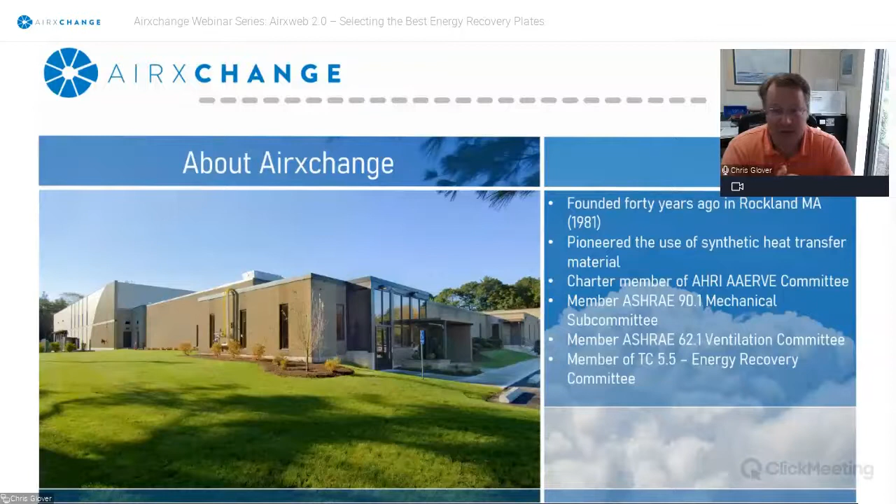We are a dedicated OEM component supplier, so we do not compete for air handling business. We just work on heat exchanger components, and hopefully we do that very well. We currently have over 300,000 components in the market, and that number continually grows year after year.

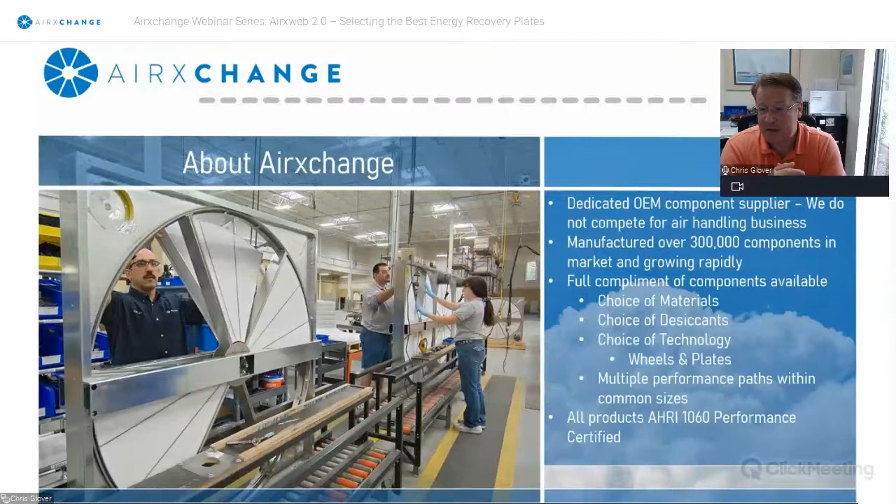As a company, we provide a full complement of components available, where we can provide choices of materials, choices of desiccants that we can use, and choice of technology now. So whether you need an energy recovery wheel or an energy recovery plate, we can provide those. And in each of those choices of technology, we offer multiple performance paths, giving you different options in regards to how you want to size the equipment and what type of performance you want out of it. All the designs we offer to the market are AHRI 1060 performance certified.

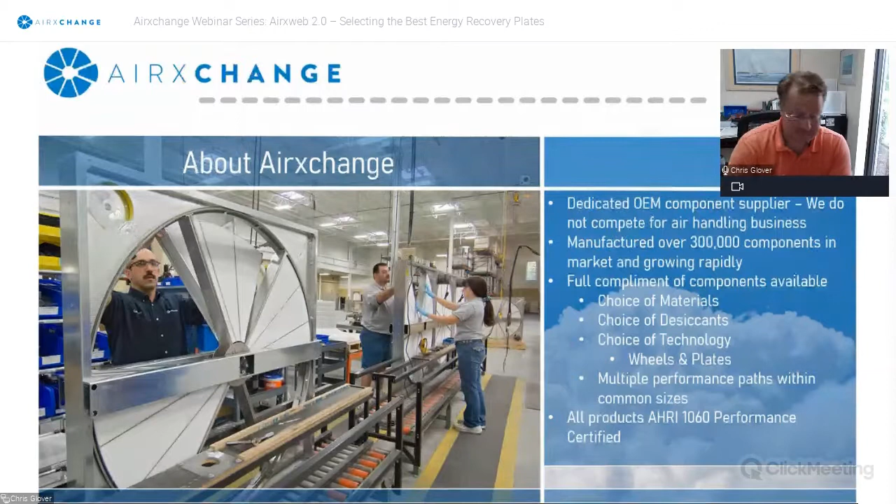Okay, so for today's technical discussion, it's really just AHRI certification. AHRI standard 1060 is the performance rating for air-to-air energy recovery ventilation equipment. Part of the certified ratings you get as being part of that certification program are sensible effectiveness, latent effectiveness, supply and exhaust air pressure drop, exhaust air transfer ratio, a lot of people call it leakage, and outdoor air correction factor.

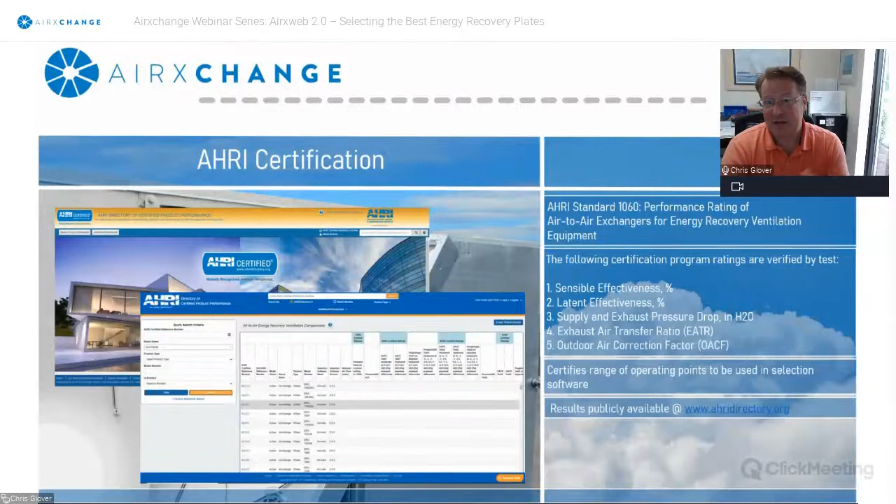It has recently changed. It used to be based on static operating points, but it's recently changed to a software certification model where it basically certifies a range of operating conditions. So it's no longer based on static points, but more based on an operational window, or a psychrometric window of operation. So you get a better, more thorough test of the equipment, as well as the reliability that you're going to be able to accurately operate this in a range of conditions.

And if you're part of the software certification portion, they no longer publicly publish the rating points, but they do publish the most recent software version. So you can just go to the software provider's website and pull in that information, and that should be up to date.

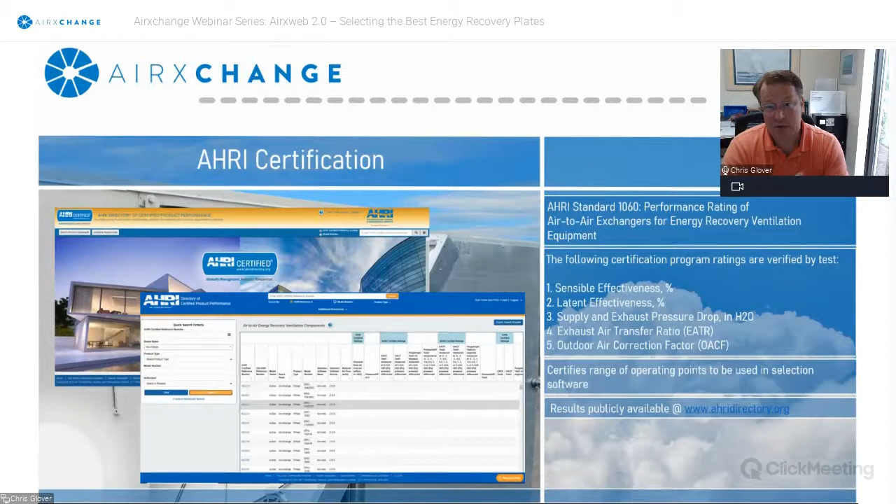Okay. Sorry about that, I just heard a noise. I thought someone was chiming in.

So in terms of the key performance metrics, the takeaways from being part of the AHRI program, a lot of people fall back on effectiveness. Effectiveness is the ratio of actual energy transfer—sensible, latent, and total combination of both—to the product of the minimum energy capacity rate and the maximum difference over the maximum difference in temperature, humidity, and enthalpy. A lot of folks have used this to size and select their equipment.

It can be tricky at times because depending upon what version of the definition of effectiveness you're using, it may or may not take into account the psychrometric change due to leakage. It's also not balanced to the supply side of the equation. So in theory, you can have a very effective device but not getting a whole lot of work out of it, depending on how your airframe is set up, or if there's a significantly leaky device you're working with.

A more recent term that's being used is enthalpy recovery ratio. This is referenced in ASHRAE 90.1, the energy standard, and it's the value you'd use to make sure your device is in compliance with the energy recovery portion of 90.1. What it really does is take the effectiveness definition and weight it to the supply side, not taking out the change due to psychrometric leakage. So it accounts for the work the device is doing on the actual conditioning of the air it's providing. It's just a newer metric, and one I like to point out because it's probably going to be used quite a bit in the upcoming future.

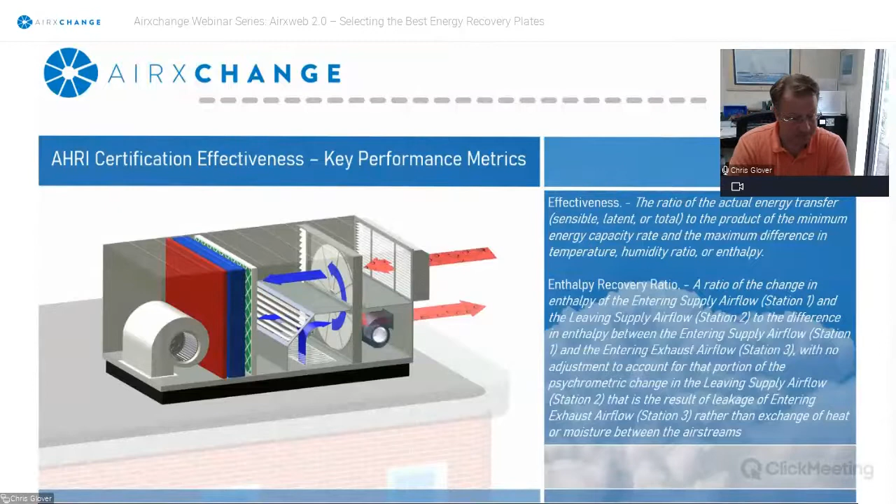All right, why aren't you sliding over? There you go.

Exhaust air transfer ratio, EATR. A lot of folks refer to this as leakage, and it's basically the opportunity for a component of the airstream coming back into the exhaust side to go back into the supply airstream. The certification for this value is done based upon a tracer gas concentration. The lab injects a tracer gas into the system, then measures a mass flow measurement to determine how much is actually transferred as the device operates.

I'd also like to point out that regardless if it's a wheel or a plate, there is going to be a certain amount of leakage, albeit plates leak less than wheels, but there's still a small amount. So you have to take that into consideration when designing your system. That value is measured as a percentage. As you can see in this example, it's 2.5% of the total delivered airflow to the space.

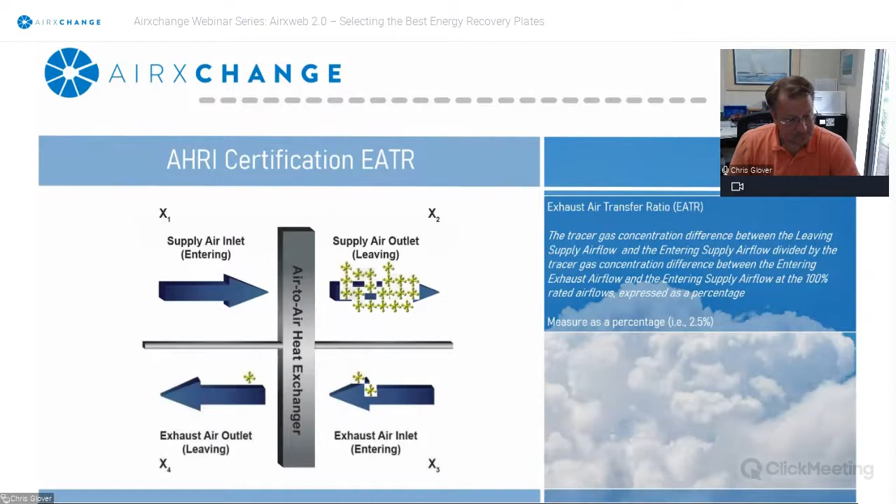It's this value that's used to determine how to size your fan capacity. So if you're operating with an OACF of 1.05 in this case, you'd have to design your fan system to be 5% above the nominal ventilation rate to make sure you're delivering the net ventilation air to the space. So it's a very important value to take into consideration when looking at the system parameters of the ERV component.

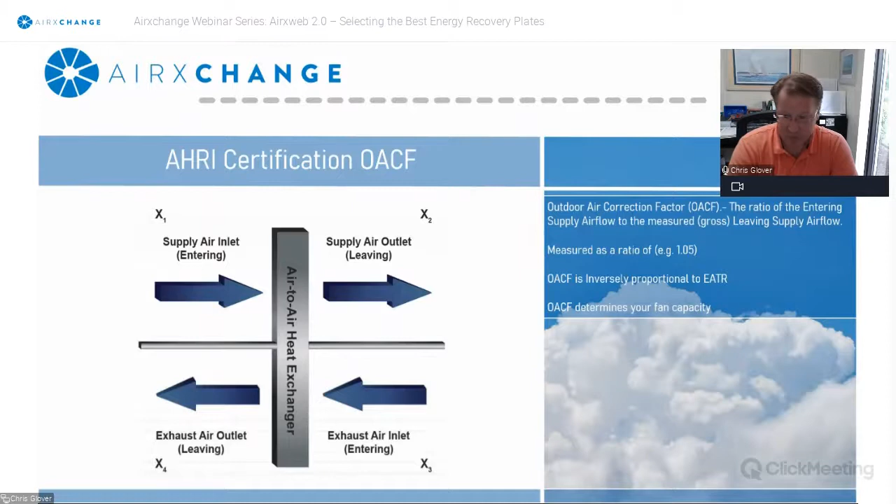All right, so let's go right into some of the product review. It's not very often I get to talk about products—it seems like most of the time I'm on these things I'm talking about technical and application-specific stuff. But it's a good opportunity to introduce you to some of the things we can offer to the market and what differences and benefits they may have.

So currently we have three different energy recovery product lines. Let's start with the Sequoia. The Sequoia is our legacy product, the one we've had for the longest period of time. It's made of a porous membrane, a fiber-based membrane. It's a total enthalpy device, so it's going to do a portion of sensible and latent heat transfer.

We currently have stock sizes from 275 millimeter to 1100 millimeter end caps, and I'll go over some of these definitions in a little bit. We have a standard product offering of up to 4,000 CFM in this size. We do have a significant amount of standard end cap sizes, but we can offer custom sizes depending upon the application and what you're looking to do with the product line.

And we have multiple performance profiles once again, so you're not stuck with a singular performance curve. We can offer different densities so that we can provide different performance-to-pressure-drop ratios to meet the need of the application or the design of the cabinet that you're going to put these in.

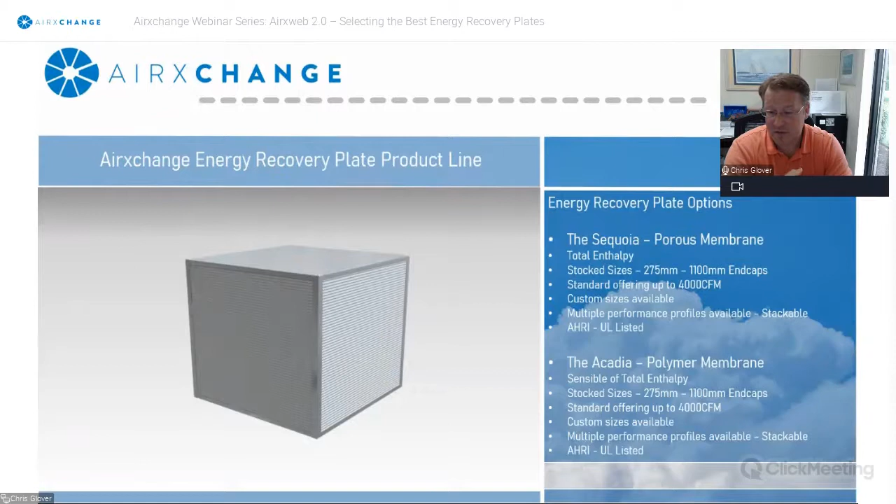We do have a certain amount of stock sizes we can offer, but there is availability if there's a certain market or volume we're looking to reach—we can offer custom sizes based upon whatever feedback we get. They are stackable just the same way the porous membranes are, and once again, they are AHRI and UL listed.

Our last plate is kind of unique. It's the Sedona. Once again, it's another polymer membrane. It's our sensible-only high efficiency plate. It's a cross counterflow in lieu of just the counterflow devices, so it provides a relatively high sensible effectiveness in a very small footprint.

We have a standard offering up to 400 CFM, so this is relegated to some of the light commercial residential markets. And it is AHRI and UL listed.

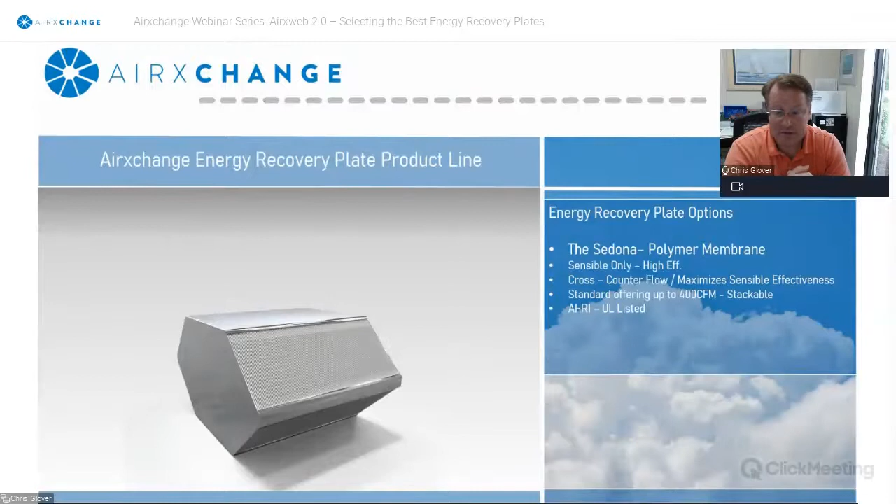To go into some of the plate design features of the products we offer: all of the plates are high structure plates, meaning they can withstand a significant amount of pressure drop as well as pressure differentials, in cases up to 5 inches of water gauge, so that's significant. They're very structurally rigid and durable.

All the materials do not deform under high humidity applications, so this works well if you're working in a coastal environment or in an environment of the country where there's a very high moisture load. They also have an antibacterial coating as well as UV resistance.

Going on my soapbox for a second, I'm not exactly sure why you'd put a UV light in the energy recovery component. The jury's still out on that, but once again, if you wanted to, it is UV resistant.

So the maintenance features of each of the plates: the Sequoia model is what we call our cleanable model, so you'd use a vacuum and a brush to clean that one. The Acadia, which is our newest polymer model, is fully washable.

So you can submerge this plate in water to clean it. And that has some synergy with our polymer products and provides similar benefits that our polymer wheels would provide. Where if this is going to be in a dirty application or an application where it's going to get fouled at a quicker rate, you may have an opportunity to give your customer something that's longer lasting and more maintainable through this process.

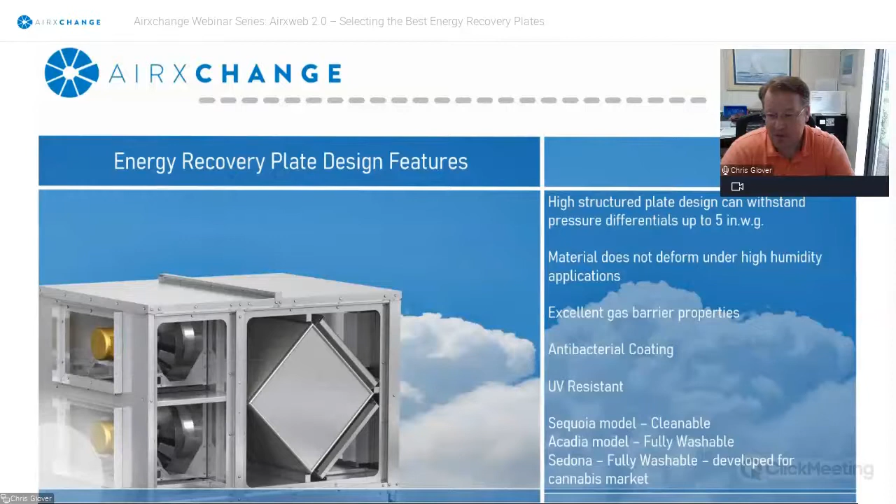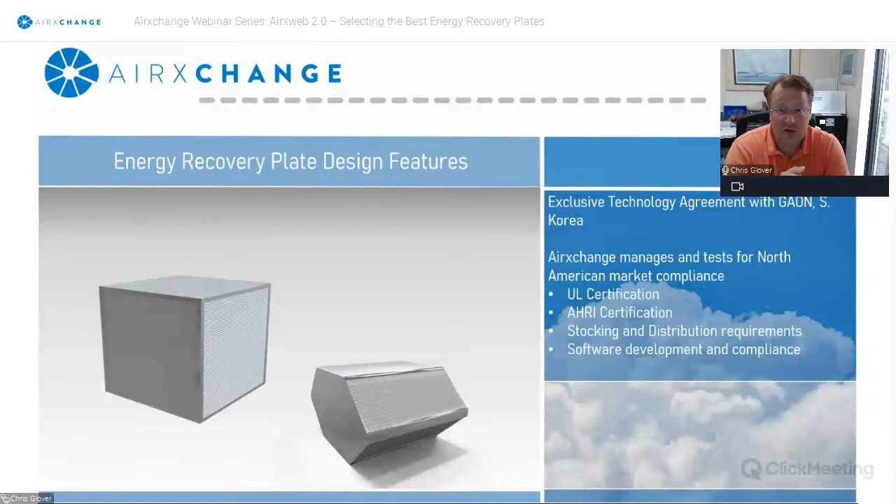We are the exclusive technology partners for GAON, so our plates come from South Korea, and we actively manage and test for North American market compliance. We do a lot of work with them to bring these products to market, handling all UL certification, AHRI certification, as well as stocking and distribution requirements for all North American OEMs. We also do all the software development and compliance with any major certifying body in the North American market. It's a significant amount of work, and it's a great partnership between two companies.

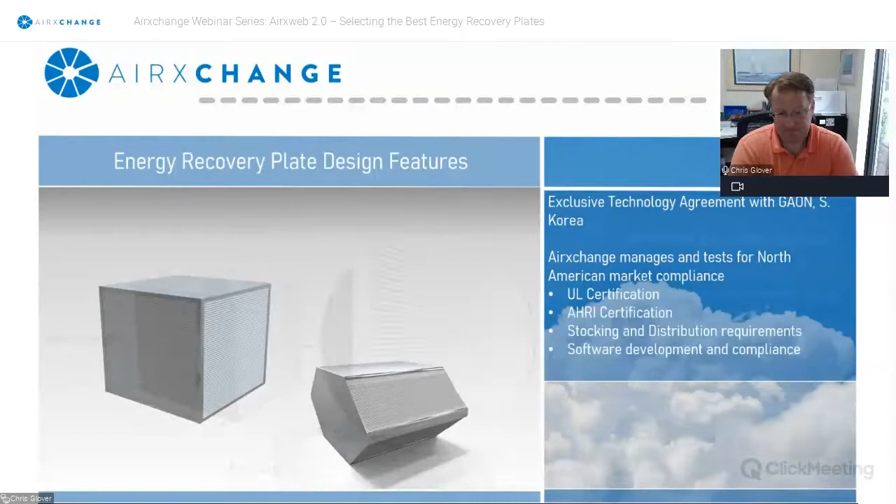Let's discuss some common energy recovery plate design terms. You may have heard me mention end cap earlier. End cap refers to the metal plates that encapsulate the energy transfer media - it's a sheet metal cap that's on top of the plate.

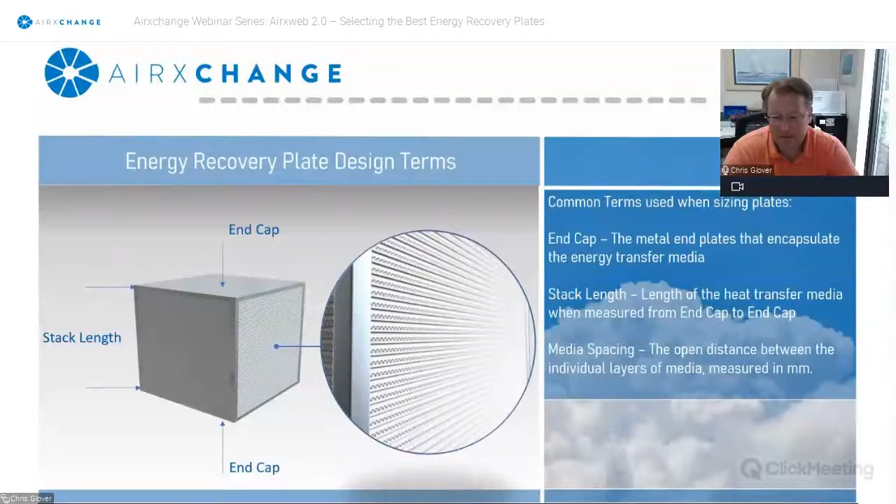Stack length is the length of the heat transfer media when measured from end cap to end cap, so it's the length of heat transfer media that's going to be in the airstream. Media spacing, as you can see in the picture on the right, is the open distance between individual layers of media measured in millimeters. The tighter the media spacing, the more effectiveness you get out of the system, but the higher the pressure drop. As you open up that media spacing, you'll lower the pressure drop, but you'll lose certain effectiveness.

We've developed Airxweb, our Airxchange selection software - it's our one-stop shop for energy recovery. Regardless of what component you're looking to size and determine the relative performance for, you can go to Airxweb to get it. It has all our AHRI certified wheels and AHRI certified plates under one platform, and the entire product line can be found at Airxweb.com. What's nice about a cloud-based platform is it provides real-time performance prediction based on our AHRI certified values, so you're always using the most up-to-date, relevant information - not only from our AHRI perspective, but also the weather data we pull in.

We bin all the weather data on the fly within the program, so you're always using the most up-to-date information. It allows you to set custom operating schedules so you can see what the annual performance for these devices will be. It uses the latest bin data from NOAA and ASHRAE worldwide weather stations - we have access to their entire database. It's a significant amount of data to crunch, but it gives you a really good overview of how these devices will operate based on the best information available.

You don't necessarily have to know the size of the component you're looking to select. We allow you to select based on either size, if you know it, or any performance metric - so if you're sizing based on meeting a certain leaving air temperature or minimum effectiveness, we give you options on how to query this data so you can make the selection based on the parameters that mean the most to you.

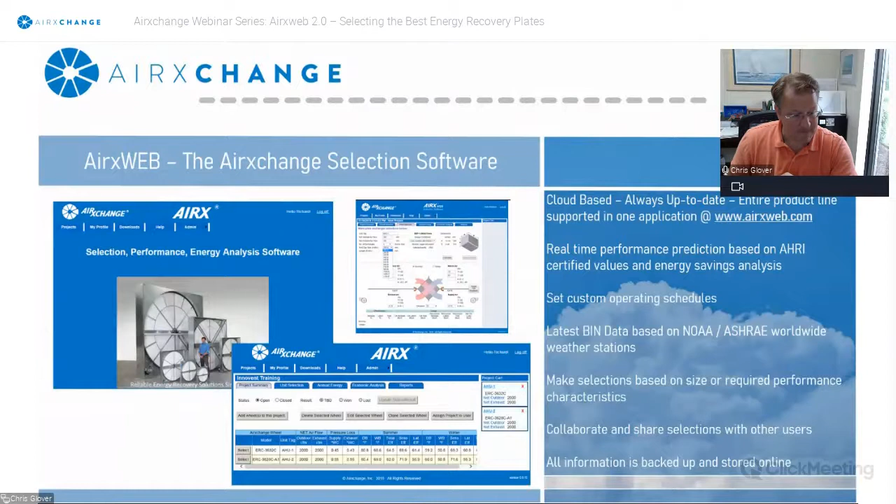Lastly, I highly recommend, if you get the opportunity, go to our website. We've done a lot of work to put it together - there's over 40 years of marketing and technical resources at airxchange.com. This includes all our catalogs, brochures, white papers, peer-reviewed technical articles - some authored by us, some by others in the industry relevant to energy recovery - as well as application documents, case studies, and educational resources. We also have service and maintenance videos, so if you're out in the field working on one of our devices, most likely we have a video demonstrating what you should be doing to service and maintain these devices to ensure a good long life expectancy.

I'm going to keep this slide up here and dive into our software program - let me open it up right now. Does anyone have any questions before I switch over to demonstrate the software selection?

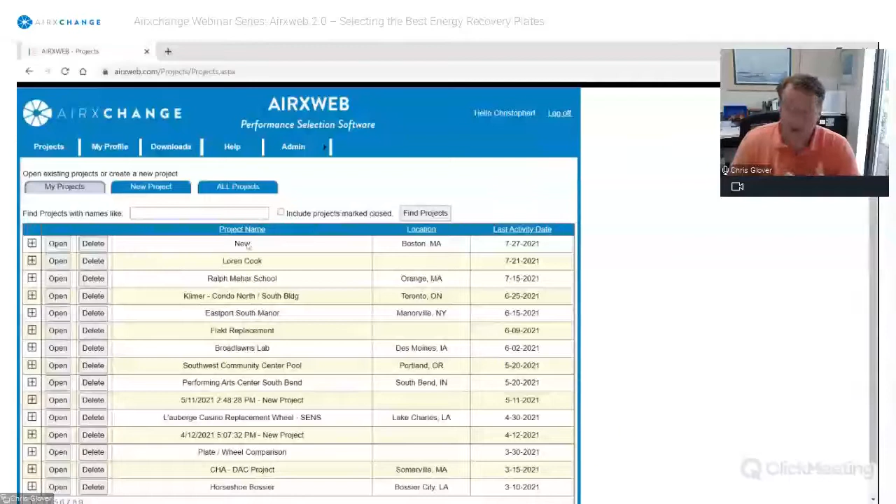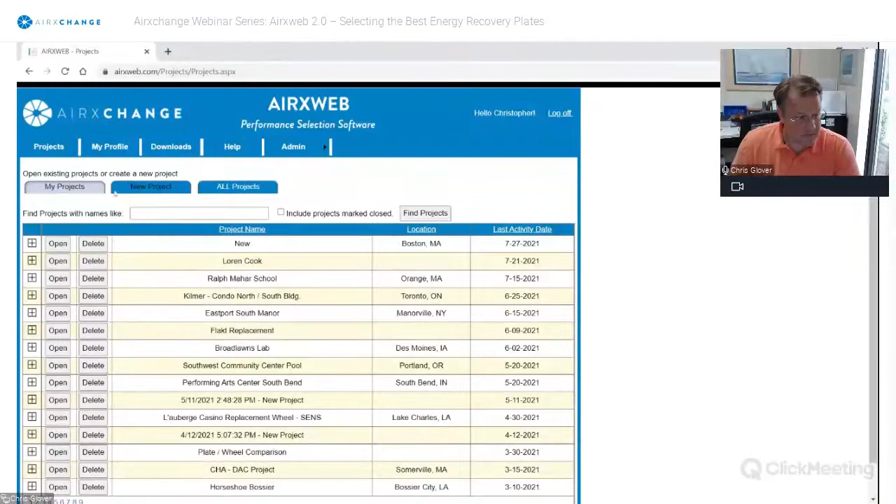Okay, so let's create a new project where we're going to select a couple plates. Once again, it operates from going from the leftmost tab over to the right. So we'll just include a new project. There you can see my many projects that I've been working on. We'll put in some very basic information here.

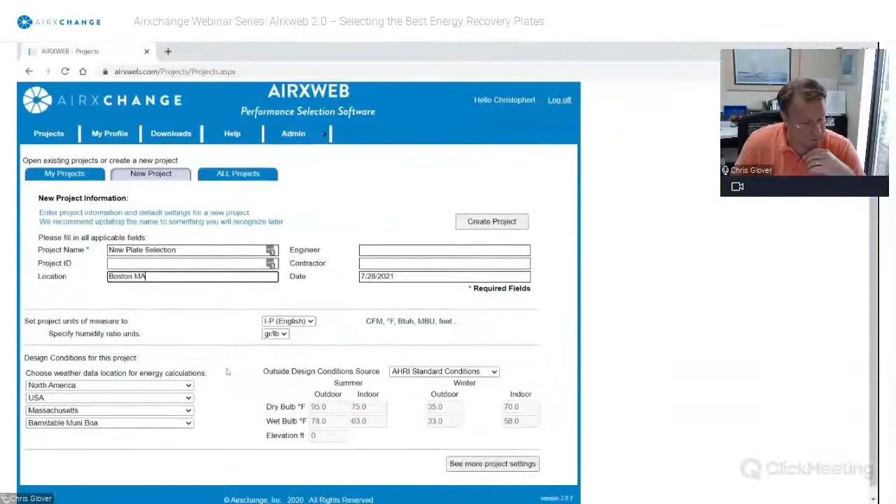And I'll choose Boston, Massachusetts for the location. It allows you to select your units of measure from inch-pound or SI. I'm going to keep it inch-pound for the time being, as well as your humidity ratio units. And I will select Boston as our city. But here you can see where you can select the worldwide weather data, so we can select North America. We can select basically any continent that you're working in, as well as localized weather data based upon the weather stations that are in that area.

We can use AHRI standard conditions as well as the selected conditions for ASHRAE. I'm just going to keep it at standard conditions for now. You can also use custom conditions, so you can put in whatever operating conditions may be applicable to your particular project.

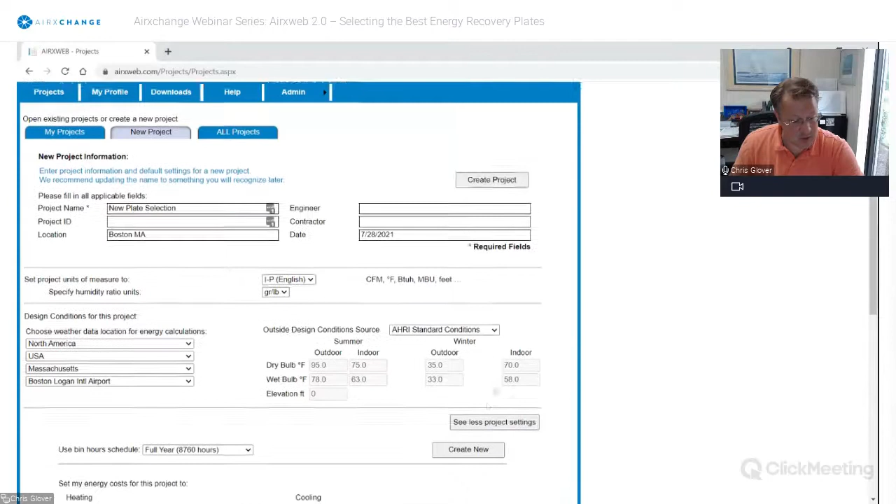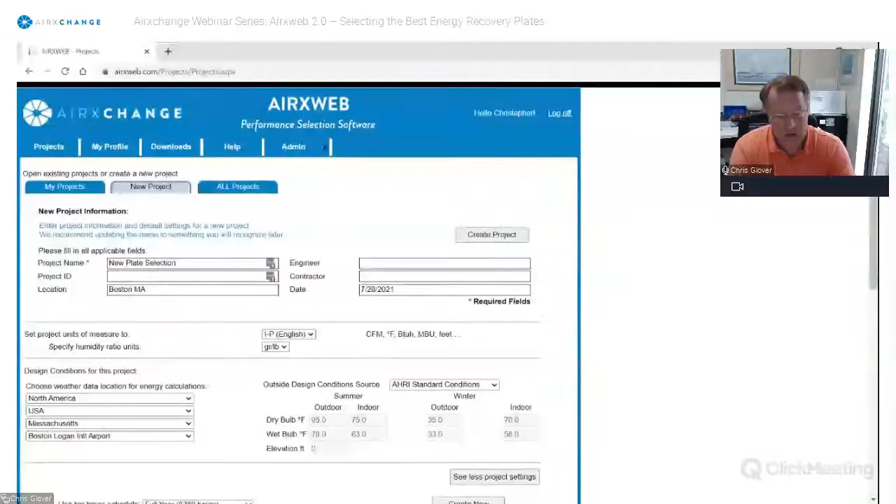So there's a lot of flexibility that's kind of built into creating these projects, and we try to put it together in a user interface that has as minimal amount of steps required to get you to an output, but it really still has all that flexibility built into it. So we'll create this project.

Yeah. Oh, that's why. So I must have been doing something very similar earlier.

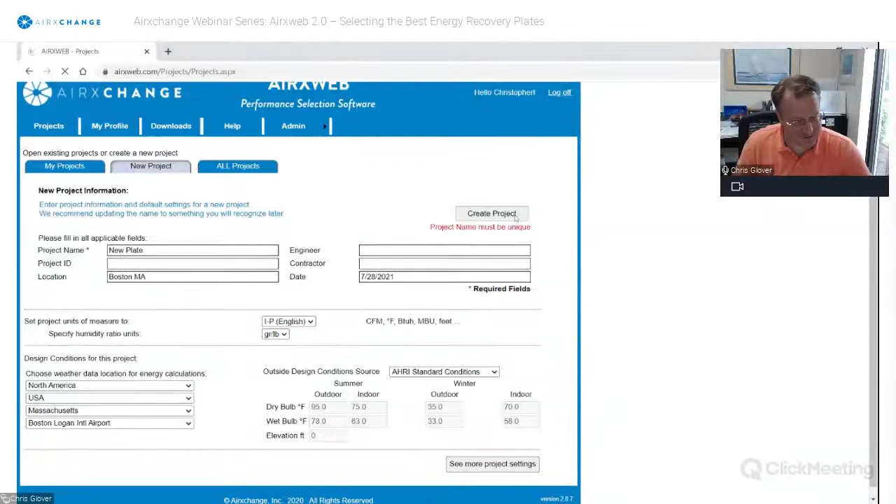There we go. Okay, so let's go and open up our new plate selection, and we're going to add plates to this project.

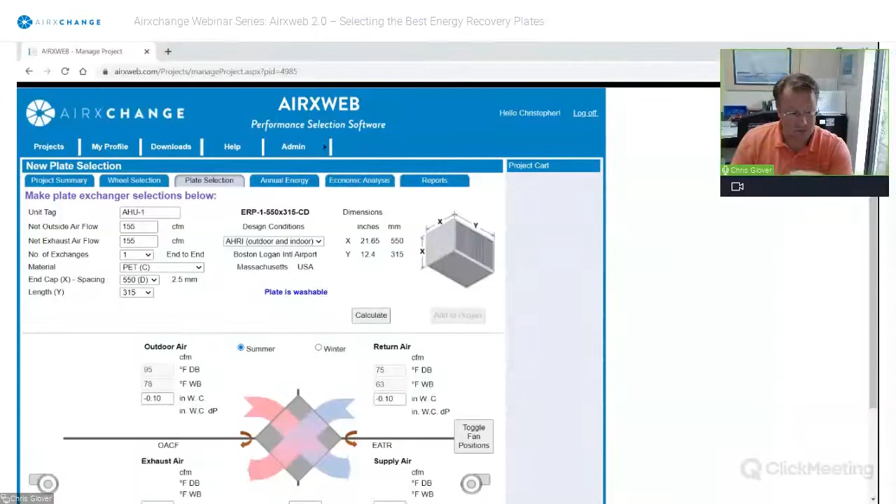Now, there's really two criteria for selecting a plate. One is you're working with an existing OEM and they already have their own designs in place, so that's kind of easy - you would just take those plate sizes and plug it into the information here. Or if you're working on a relatively new design, you can go back in here and make selections, not necessarily based on any given size, but what would be relevant to your design.

So the 550 by 495 is probably one of the most common sizes in the market for plates these days. It gives you a good amount of options when developing either a new design or, most likely, working with an existing design. For this particular case, I'm going to keep it at the default selections.

Once again, plates are somewhat scalable in nature when you stack them side by side. Here you'd be able to make the number of exchangers end-to-end - but we'll keep it simple for this particular selection. Once again, the design conditions we're going to keep at AHRI conditions. You could change it to user-supplied conditions or really any other condition that you'd want.

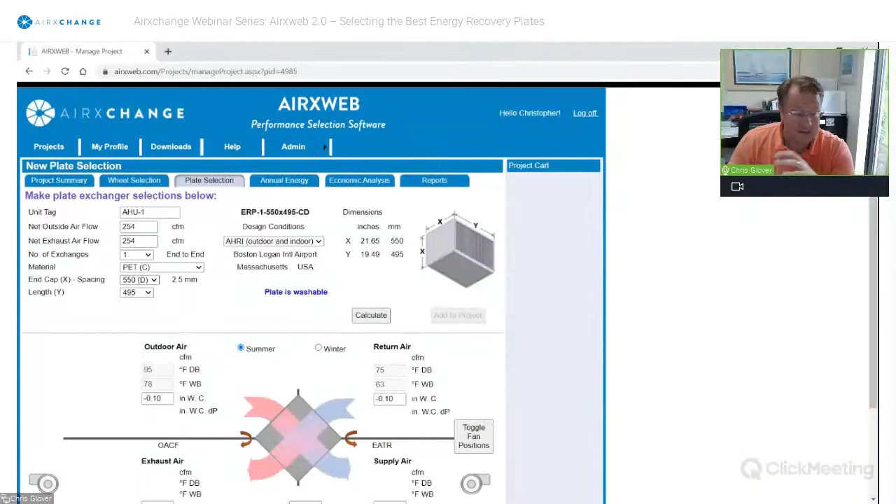You'll notice when I make these selections that there's a letter next to the end cap sizes. That letter refers to the spacing between the individual media layers. So these are our standard sizes - you can see it's at 2.5 millimeter for our plate spacing. Let's say if we go to a 1,000 millimeter end cap, this is an E spacing, so it's 3.1 millimeter.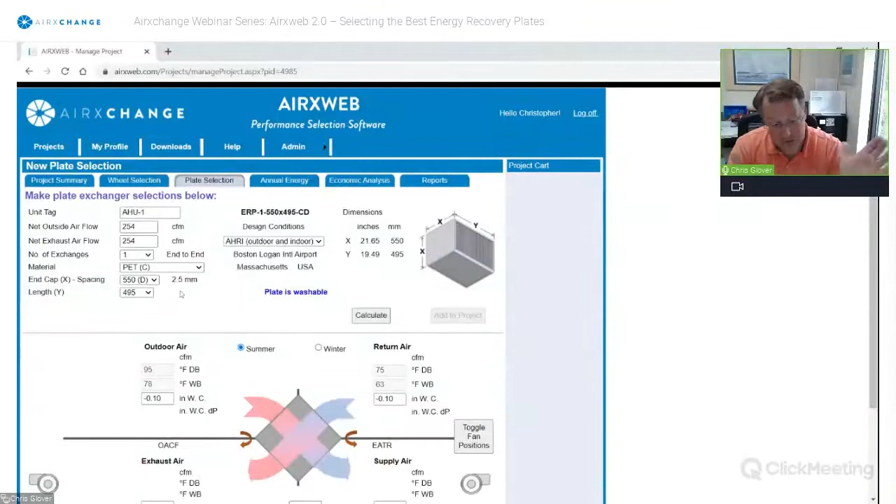So basically, you'd make your selection, and that's good to be aware of before making these selections. After you make all those selections, you can see that the dimensional chart has been updated on the right. It gives you your end cap sizing in these X dimensions, as well as your stack length, which would be your Y dimension.

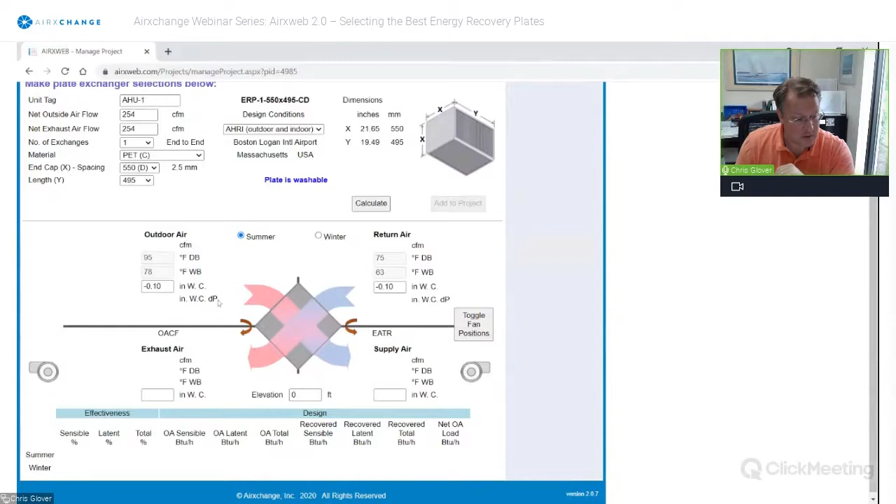Here you can see these are your operating conditions for your plate. These are counterflows, so it's kind of a diamond shaped pattern with counterflow. Because we're using AHRI standard conditions, these values are kind of blocked out, but if you wanted to, you could add user entered information here. We use some default operating pressures, defaulted to these values. You can change them to whatever you want to mimic your design, as well as toggle fan positions.

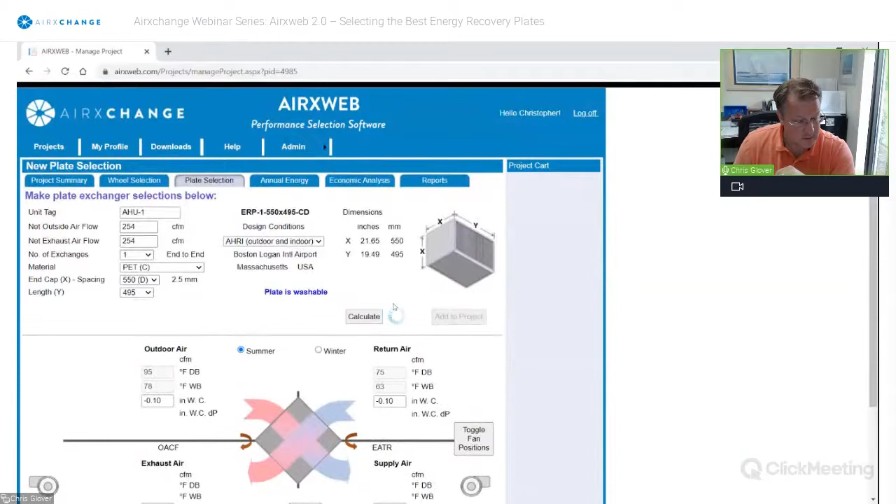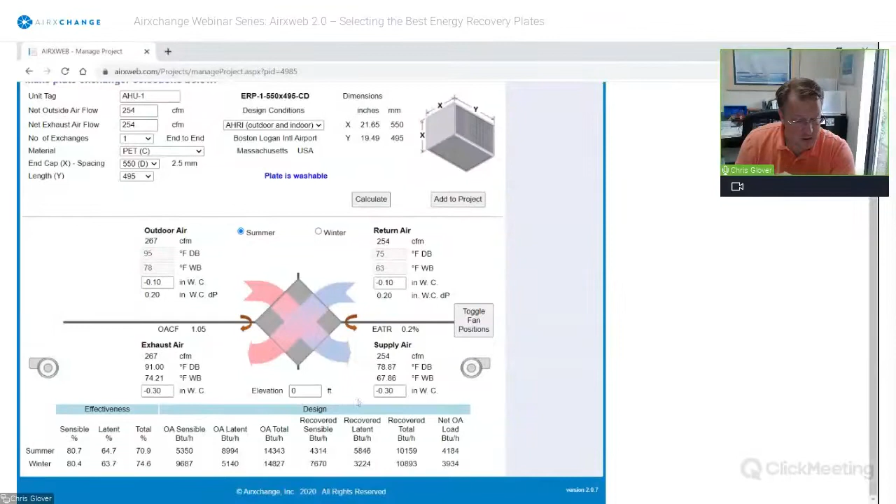Let's calculate this particular plate. It's going to populate this information below to give you what this plate is going to provide in terms of operating performance. So you can see we have our effectiveness values to the left, as well as our design loads and reduction on that design, which is the recovered load, on the right. From here, if you liked what you see, you can hit add to project, or if you wanted to change the performance of these devices, you can go back in and make some changes.

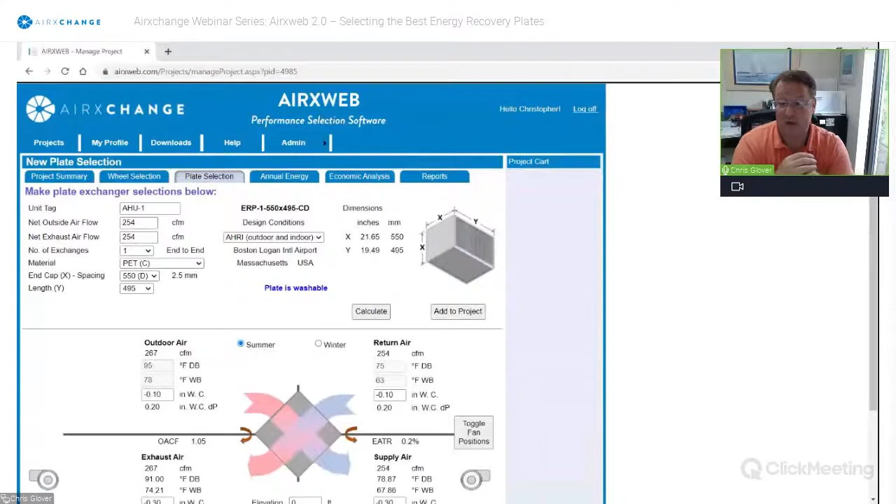Typically when you're looking at plate sizing, because they scale by the cube, not necessarily just by the diameter like wheels, there is going to be some give and take when you're designing these. Should you consider larger cores versus multiple smaller cores to maximize airflow, or should you look at a larger stack length, or possibly a larger end cap? As the end caps grow larger and larger, so does the pressure drop typically. So sometimes it's more beneficial if you have the opportunity to select a smaller end cap size, but have multiple cores to maximize the area of airflow across the heat exchangers. There's going to be a balance between those designs.

If you have any questions, or need some guidance based upon a particular design, always reach out to us. We're happy to help take a look at the design, and we can give you some guidance on what might be the best combination of plate to the amount of air you have available in your cabinet. Or if you have any other particular selection criteria you're looking to meet, we can probably provide guidance in that manner as well.

Great, so we added to the project. From here, we can add more to the project if you have multiple different units operating at multiple different CFMs. To keep it simple, we're just going to keep it at one right now. And then once again, you move from the leftmost tab to the right.

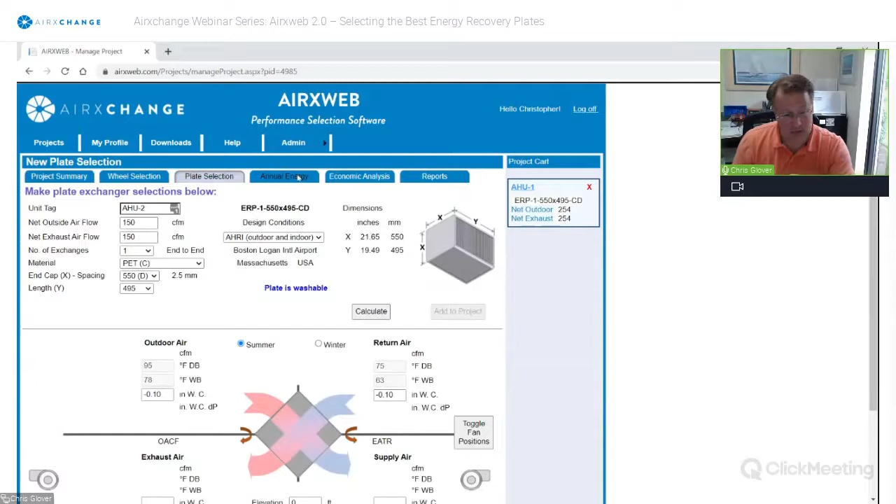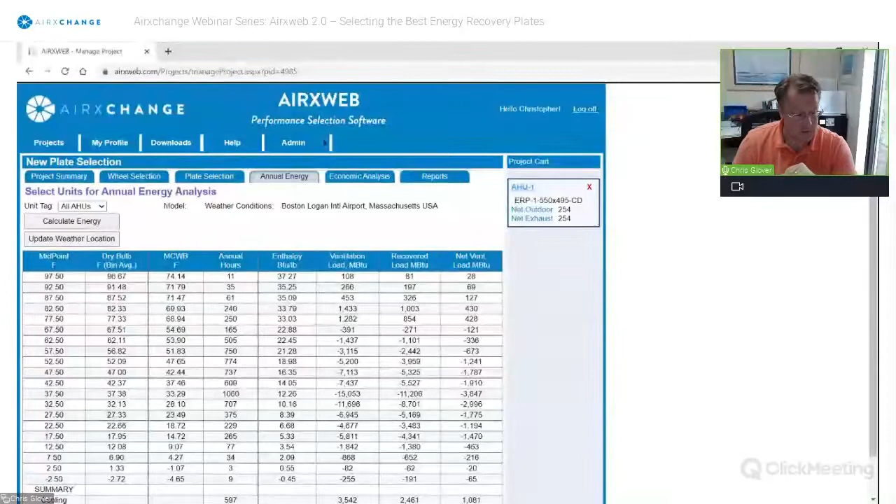Here we can go into your annual energy savings. We can calculate the energy load and the recovered energy load that this device is going to provide for the year, on the fly. Based upon what we have here, you can see I selected a 24/7 application. We have a lot of heating hours in Boston, typically a heating market. So here you can see where the big benefit is going to be for using this device. It's going to be in the heating season for the most part.

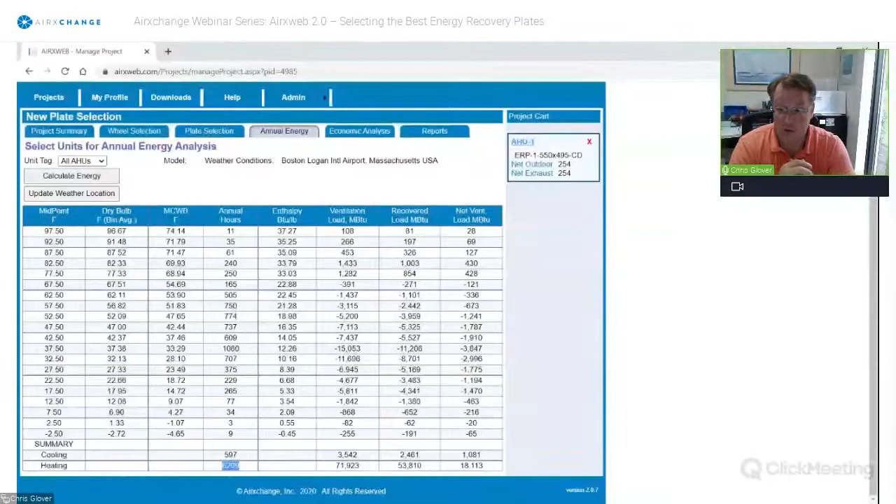So this is your ventilation load, or what would have been your ventilation load, and here's your recovered load. This is what the energy recovery component is doing for you, and what the net ventilation load is. So here you can get the value proposition for using these devices and the energy proposition.

We also include an economic analysis. I do like to say that the economic analysis is purely operational. It doesn't take into account any type of downsizing from the system that would happen when you incorporate these devices. That's not saying you should disregard that benefit, but what we look at is merely the operational savings. So here you can calculate the economic value for having these devices, including what the cooling dollar saved would be, what the heating dollar saved would be, and what your net savings would be for using this component.

You can change and update your efficiencies and utility data. So here you click here. Say your system's more efficient or less efficient, you can make that determination here, as well as your utility costs. We kind of defaulted to 10 cents a kilowatt hour and $1 per therm, but if you're in an area where it's cheaper, here you make those changes, and then you continue going from left to right.

And then lastly, if you like everything that you see here, you can generate a PDF report. Here's your options for all your report options that you can include. You can include the bin energy analysis.

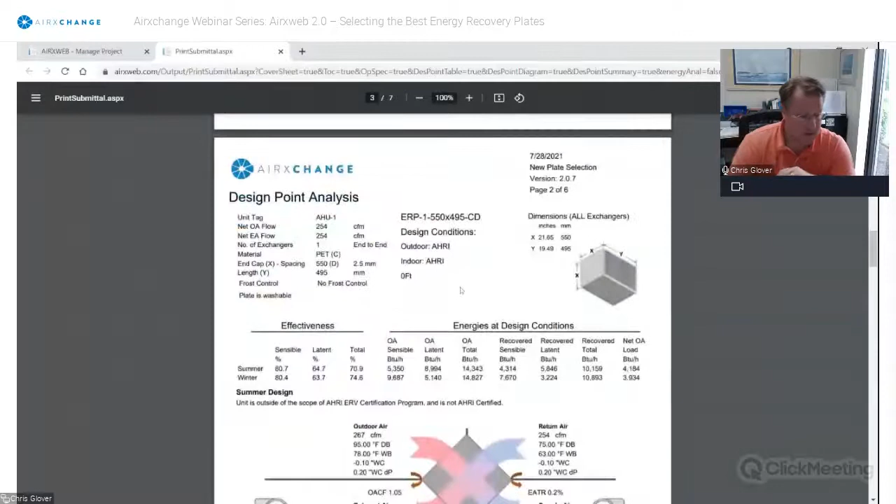So here you see all the information, kind of going into the design point analysis. Here you'll see everything that's kind of relevant to the design of this plate. So once again, you made your selection.

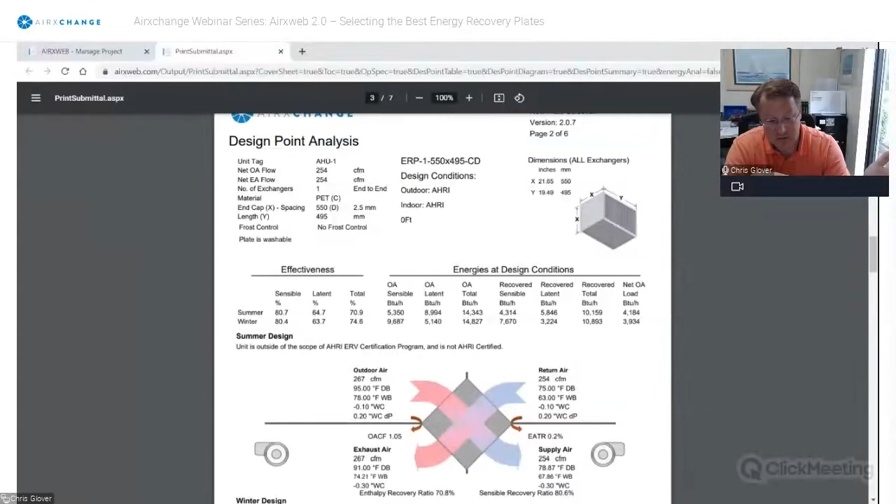One thing I didn't point out is frost control. We do have frost control built into our selection software. So if you're in the area of a country where that's may be a concern to you, that gets included. Under the AHRI standard conditions, there's no frosting under those conditions, but if you were to put in operating conditions where a frosting condition would occur, it would automatically tell you that this is something that you need to take into consideration based upon those operating conditions.

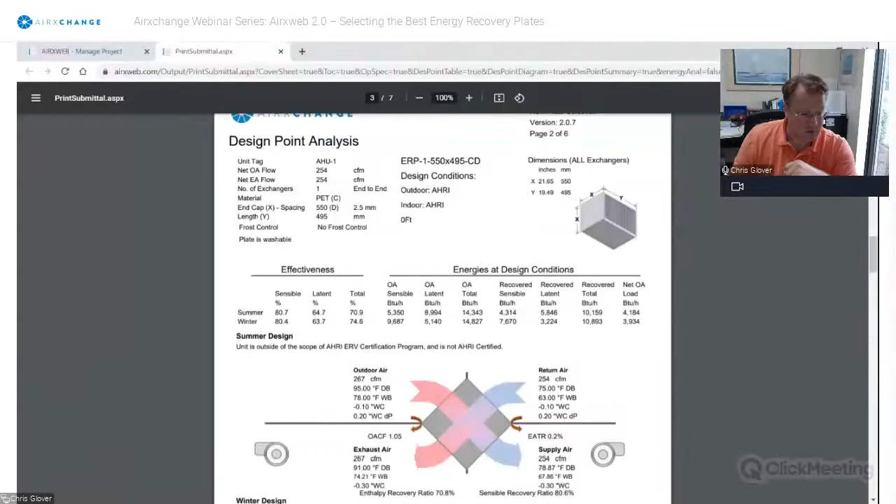So once again, it tells you your AHRI effectiveness, as well as your energies at design conditions. So here you can see the operating conditions, so you're entering and leaving conditions based upon the selected criteria.

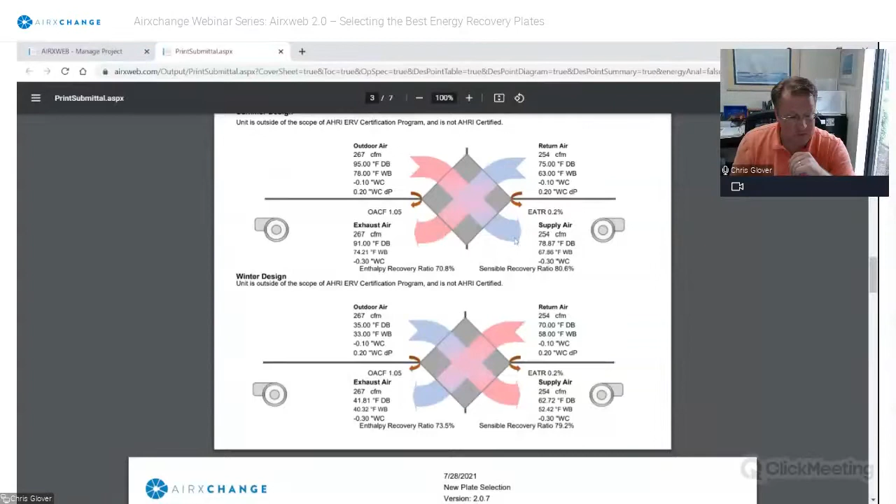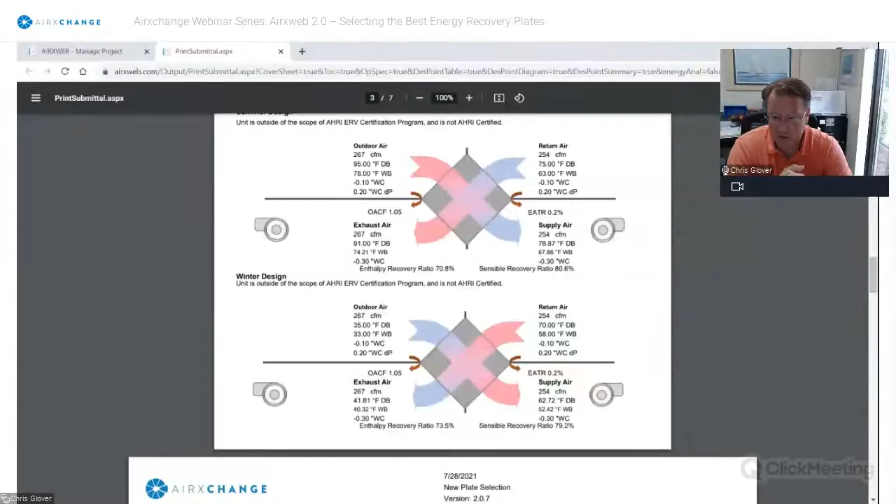Also, once again, I think this is kind of important. Here you see enthalpy recovery ratio and sensible recovery ratio. So once again, it's a newer term. It is a term that's used in 90.1. So if you're trying to remain in compliance with the energy recovery portion of 90.1, this would be the value that you'd be taking into consideration to make sure that you're meeting that criteria.

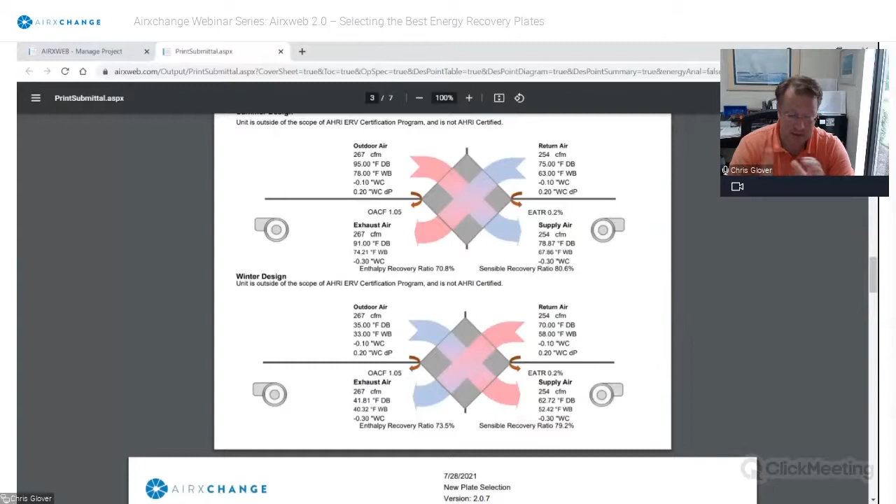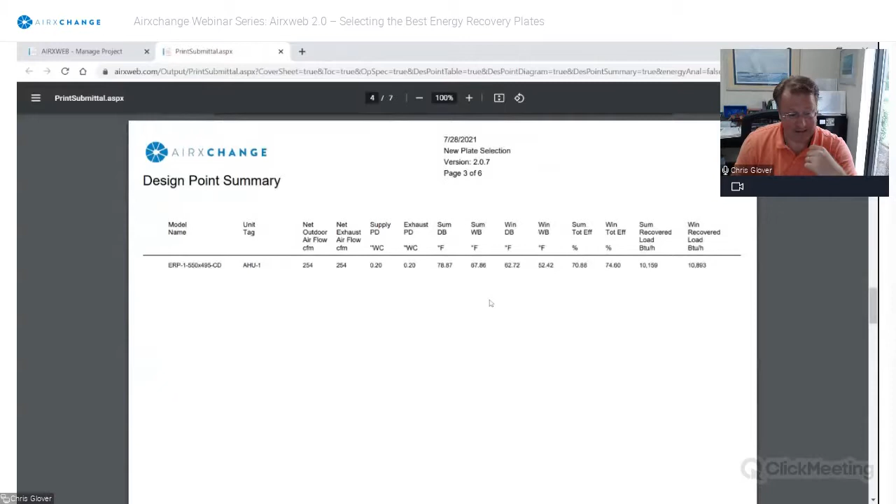So we separate it by summer and winter operations. If you had multiple units, it would be included in a design point summary, so you can get all this information at a glance. Here is kind of your economic and operating schedule summary, so everyone knows how you design this unit.

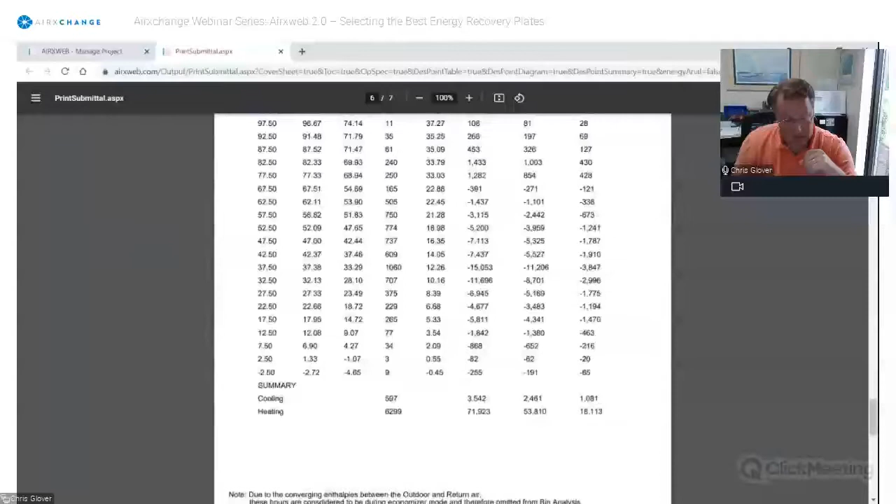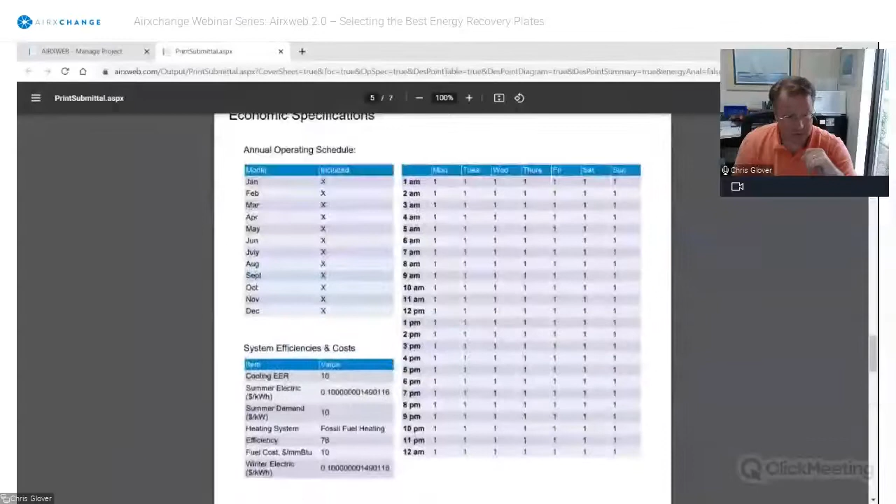As well as your bin source or bin energy analysis, which is based upon the schedule that you entered, your economic summary as well. So it kind of aggregates all that information and puts it in a nice clean report for you to use. And you can either save this as a PDF, download it.

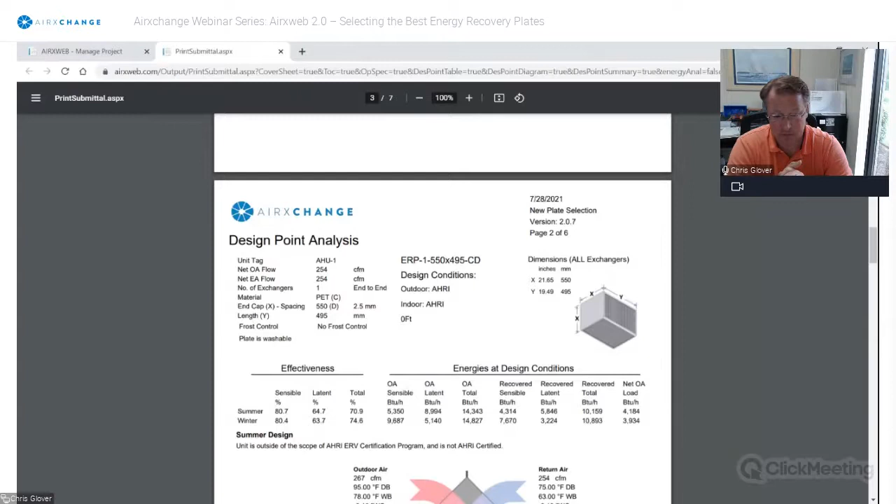But what I really like to kind of demonstrate and to mention is this: it's really your one-stop shop. So regardless of whether you're using a polymer wheel, sensible or enthalpy, or if you're using a plate, sensible or enthalpy, you really have options in the software, and everything is all located under one platform, and it includes all our AHRI certified components under this one software umbrella. So it really is quite flexible, and I hope you get an opportunity to use it.